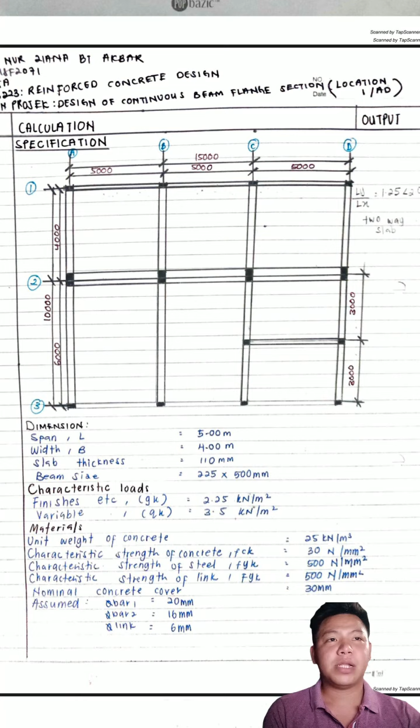Calculation beam 1AD. Effective flange width BW sama dengan 225 mm, HF sama dengan 110 mm, H sama dengan 500 mm, B1 sama dengan 1887.5 mm, B2 sama dengan 0, LO sama dengan 0.7, L sama dengan 0.7 darab 5000 sama dengan 3500, BV sama dengan 0.2 BI tambah 0.1 LO lebih kecil daripada 0.2 LO.

0.2 BI tambah 0.1 LO sama dengan 727.5, sama lebih kecil daripada 700. Use 700 mm.

Effective flange width BF sama dengan BF tambah BW lebih kecil daripada B sama dengan 700 tambah 225 sama dengan 925.

Span AB, CD LO sama dengan 0.85, L sama dengan 0.85 darab 5000 sama dengan 4250 mm.

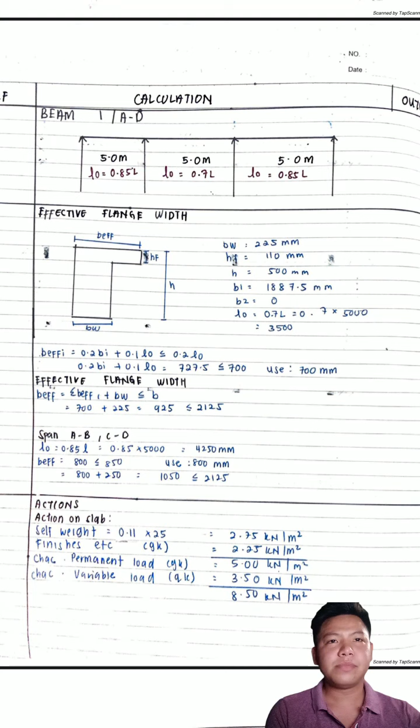Calculation. Action on beam 1AD. Distribution of action from slabs to beam are as follow. Panel 1AD.

Characteristics permanent action. WO sama dengan BW, H tolak HF darab 25 sama dengan 0.225 darab dalam kurungan (0.5 tolak 0.11) darab 25 sama dengan 2.19 kN meter.

W1 sama dengan BVN LX sama dengan 0.57 darab 5.00 darab 4.00 GK sama dengan 11.4 kN meter. Total GK sama dengan 13.59 kN meter.

Characteristics variable action. W1 sama dengan BVN LX sama dengan 0.57 darab 3.50 darab 4.00 sama dengan 7.98 kN meter. W2 BVN LX sama dengan 0.57 darab 3.50 darab 4.00 sama dengan 7.98 kN meter. Total QK sama dengan 15.96 kN meter.

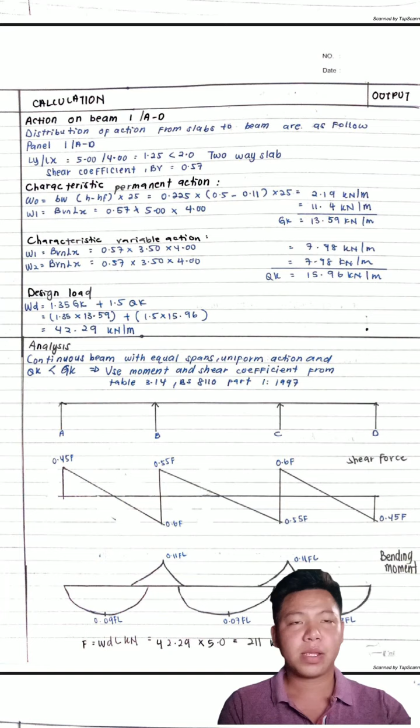Concrete strut capacity. Kami mendapat VRD max sama dengan 320 kN, theta 22 darjah sama dengan 464 kN, theta sama dengan 45 darjah.

Support A dan D. VED sama dengan 95 kN, VRD max cot theta 2.5 sama dengan 320 kN, VRD max cot theta 1.0 sama dengan 464 kN.

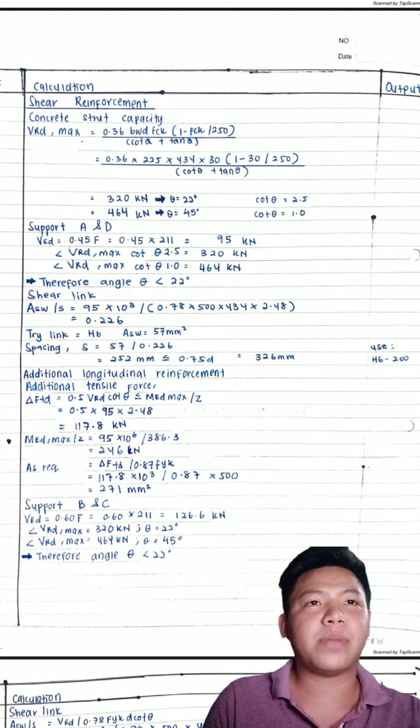Additional longitudinal reinforcement, additional tensile force FTD sama dengan 117.8 kN, As req sama dengan 271 mm².

Deflection check at span AB, percentage of required tension reinforcement P sama dengan 0.005.

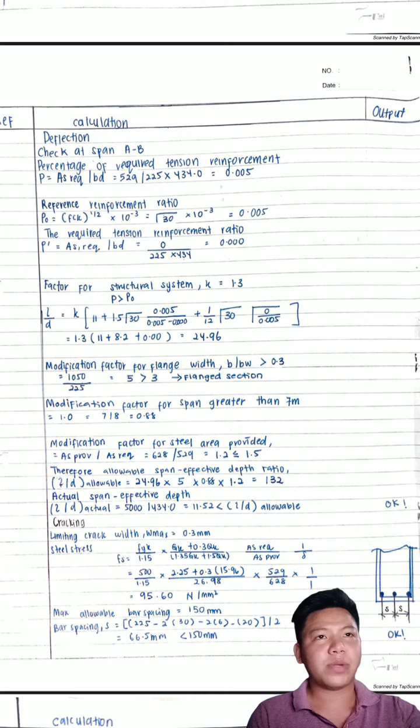Factor for structural system K sama dengan 1.3. Modification factor for span greater than 7 meter sama dengan 1.0 sama dengan 7 bagi 8 sama dengan 7/8 sama dengan 0.88. This is calculation detailing.

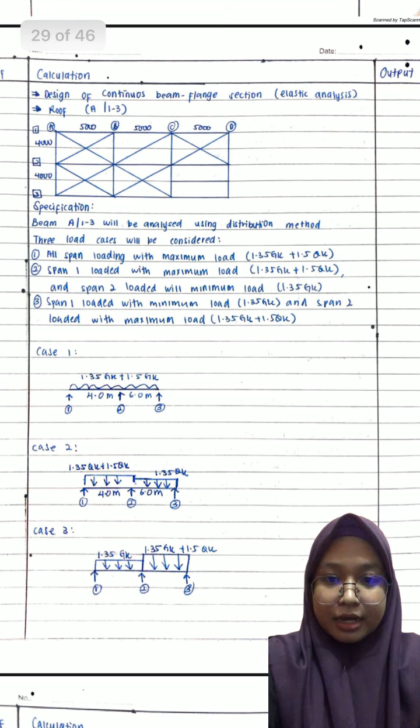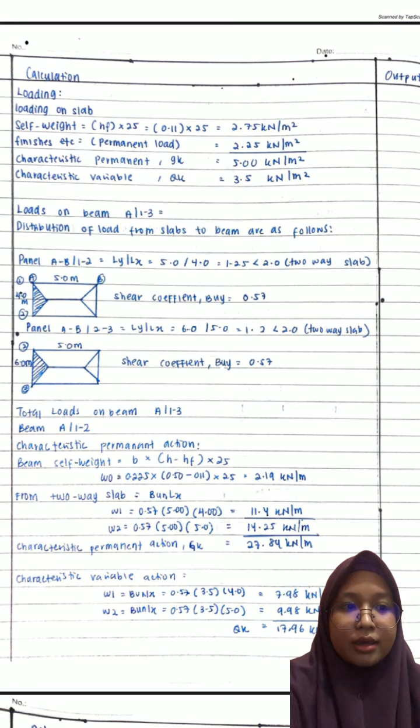Ini merupakan pengiraan loading on slab. Untuk self weight pula, kami dapat 2.75 kNm², dan permanent load dia 2.25 kNm², GK dia 5.00 kNm², QK dia 3.5 kNm².

Bagi pengiraan load cases pula terdapat dua pengiraan, iaitu W1 dan W2, maksimum dan minimum. Bagi maksimum pula kami dapat 64.52 kNm dan minimum dia kami dapat 37.58 kNm.

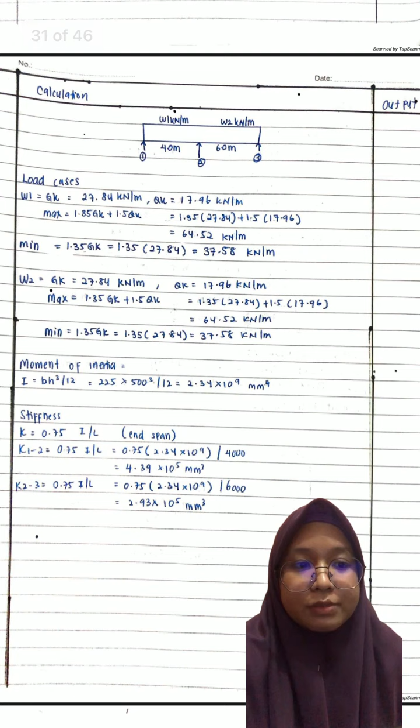Bagi moment of inertia pula, kami dapat 2.34 darab 10 kuasa 9 mm kuasa 4. Dan bagi pengiraan stiffness pula, K1 hingga 2, kami dapat 4.39 darab 10 kuasa 5 mm kuasa 2. Dan K2 hingga 3, kami dapat 2.93 darab 10 kuasa 5 mm kuasa 3.

Distribution factor pula, join 1, F1 hingga 2, kami dapat 1.00, F2 hingga 1 kami dapat 0.60, F2 hingga 3 kami dapat 0.40, manakala join ketiga F3 hingga 2 kami dapat 1.00.

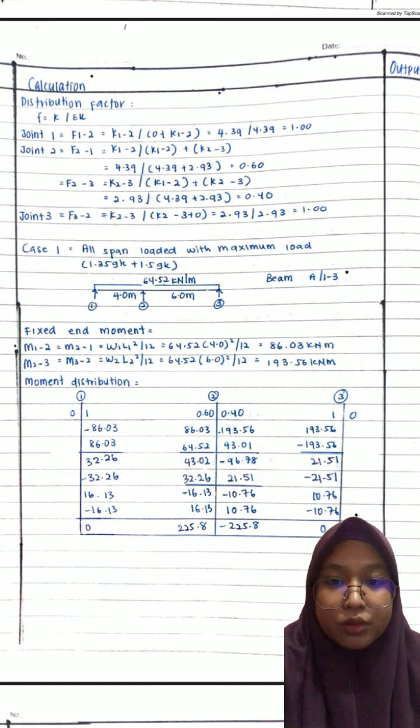Dan ini merupakan pengiraan case 1, fixed end moment dia, M1 hingga 2 kami dapat 86.03 kNm, M2 hingga 3 kami dapat 193.56 kNm. Bagi moment distribution case 1, faktor 0.60 kami dapat 225.8, manakala faktor 0.40 kami dapat negatif 225.8.

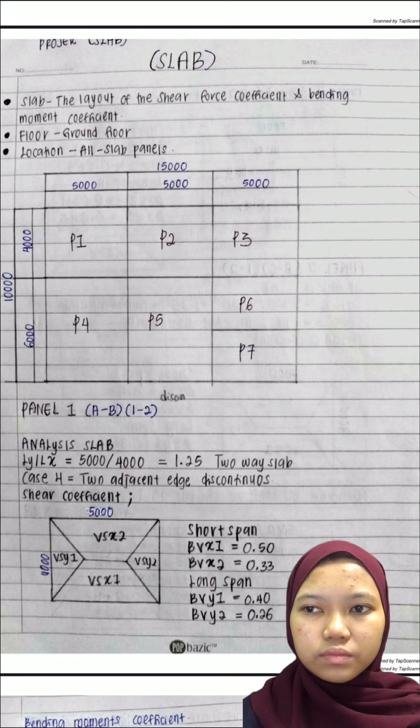Slab design, floor, first floor, location 1 to 2 or A to B. Specification, characteristic action, permanent GK 2.25 kN per square, variable QK 3.5 kN per meter square, design life 50 years, fire resistant R60, exposure classes XC1, and materials.

For FCK, we got 30 Newton per millimeter square, FYK 500 Newton per millimeter square, and for unit weight of reinforced concrete, we got 25 kilonewton per meter square. For diameter bar is 10 millimeter.

Design slab panel A to B, long LY 5000, LX 4000, LY over LX 1.25. It's smaller than 2.0, that means it's two-way slab.

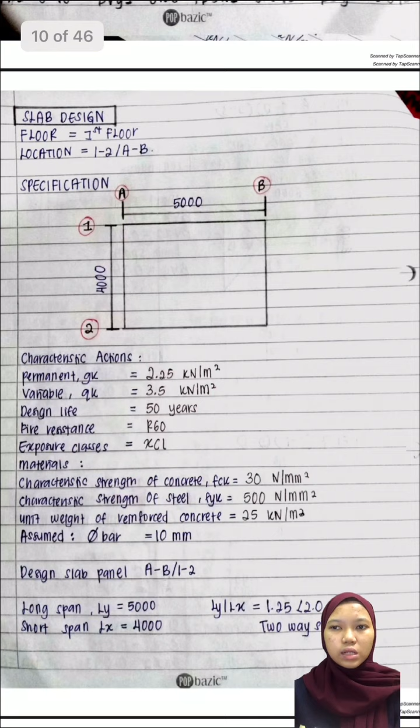For slab thickness, minimum thickness for fire resistant is 80 mm, and the H is 4000 over 30. We got 133.33 millimeter, and we try H is 135 millimeter.

For durability, fire and bond requirement, Cmin,b, we got 10 millimeter, Cmin,dur 15 millimeter, and A 10 millimeter. For Cmin, 10 minus 0.5 we multiply to 10, we got 5 millimeter. For CNOM, we got 25 millimeter.

Action on slab, self weight 0.135 multiply 25, we got 3.38 kilonewton per meter square, and for permanent load 2.25 kilonewton per meter square, and characteristic permanent action GK 5.63 kilonewton meter square, and QK 3.50 kilonewton per meter square.

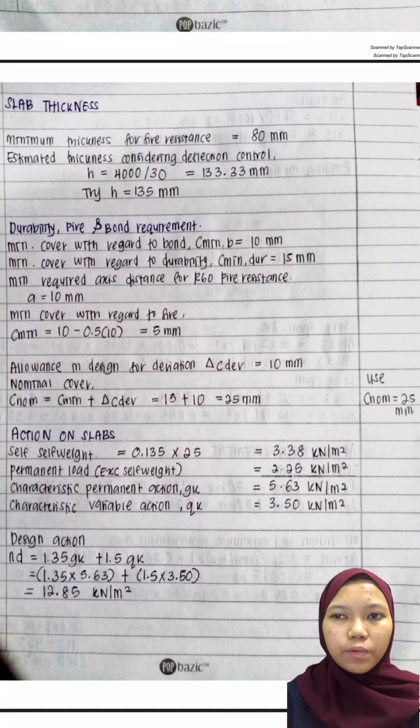For design action ND, we got 12.85 kilonewton per meter square.

Next is analysis. For case 4, two adjacent edges discontinuous. For short span LX, MSX1, we got 10.49 kilonewton meter per meter, and MSX2, we got 14.19 kilonewton meter per meter. And for long span MSY1, we got 7.00 kilonewton meter per meter, and MSY2, we got 9.25 kilonewton meter per meter.

For main reinforcement effective depth DX, we got 105 millimeter, and DY we got 95 millimeter. And minimum and maximum reinforcement area 160 millimeter square per meter, and AS max we got 5,400 millimeter square per meter.

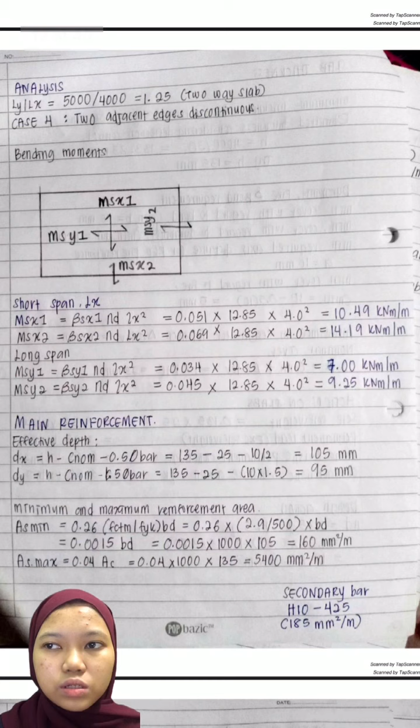And secondary bar H10 to 425, we use 185 millimeter square per meter.

For short span, mid span MSX1, we got 10.49 kilonewton per meter. K, we got 0.032, smaller than 0.167. Compression reinforcement is not required. AS, we got 241.75 millimeter square per meter, and we use 262 millimeter square per meter.

For support MSX2 is 14.19 kilonewton per meter. K, we got 0.043, smaller than 0.167. And for compression reinforcement is not required. AS, we got 327.02 millimeter square per meter, and we use 349 millimeter square per meter.

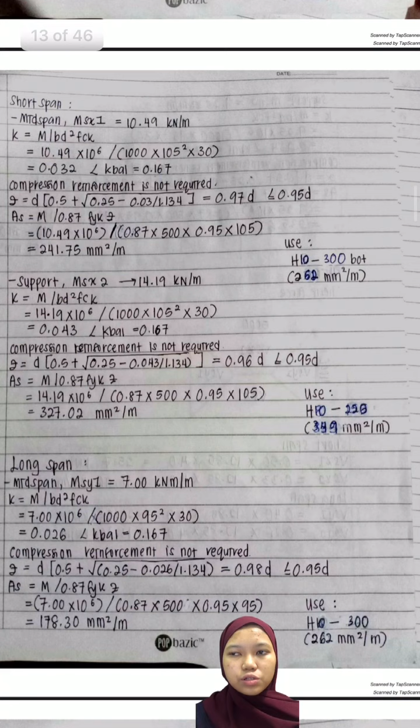For long span, mid span MSY1 is 7.00 kilonewton meter per meter. K, we get 0.026 smaller than 0.167, and compression reinforcement is not required. AS, we get 178.30 millimeter square per meter, and we use 262 millimeter square per meter.

And for MSY2, we get 9.25 kilonewton meter per meter. K is 0.034 smaller than 0.167, smaller than 0.167, and compression reinforcement is not required. We got 235.02, and we use 262 millimeter square per meter.

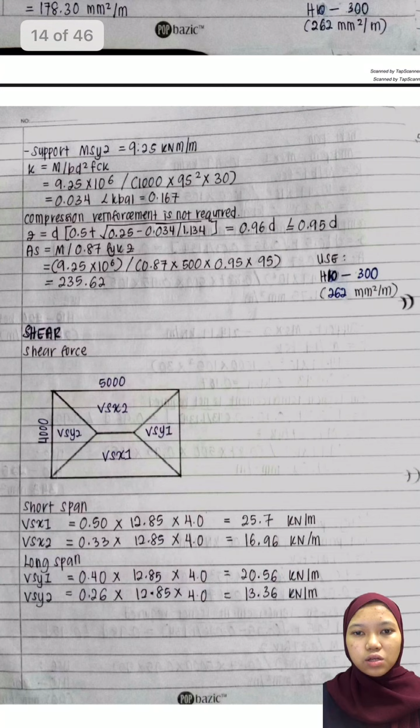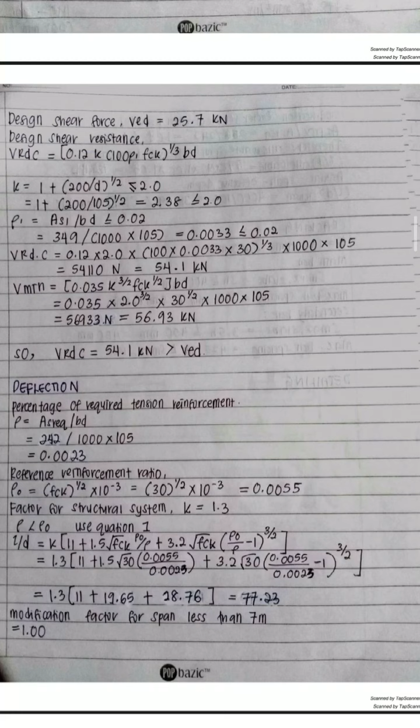And for shear force, short span VSX1, we get 25.7 kilonewton per meter, and VSX2 we get 16.96 kilonewton per meter. And for long span VSY1, we get 20.56 kilonewton per meter, and for VSY2 we get 13.36 kilonewton meter. Design shear force VED, we got 25.7 kilonewton, and K, we got 2.38 smaller than 2.0.

For P1, we got 0.0033 smaller than 0.02. For VRDC, we got 54.1 kilonewton, and Vmin, we got 56.93 kilonewton. So VRDC is 54.1 kilonewton bigger than VED.

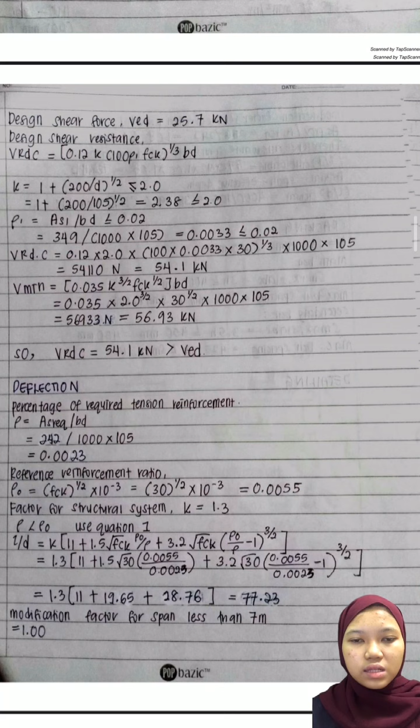For deflection, percentage of required tension reinforcement P is 0.0023, and reference reinforcement ratio PO is 0.0055, and for factor structural system K is 1.3. For modification factor for span less than 7 meter is 1.00.

For cracking, H is 135 mm smaller than 200 mm, and for main bar S max, slabs, 3H is smaller than 400 mm, and for max bar spacing we got 300 mm. For secondary bar, S max slabs 3.5H smaller than 450 mm, and max bar spacing is 425 mm. So this is the detailing of slab.

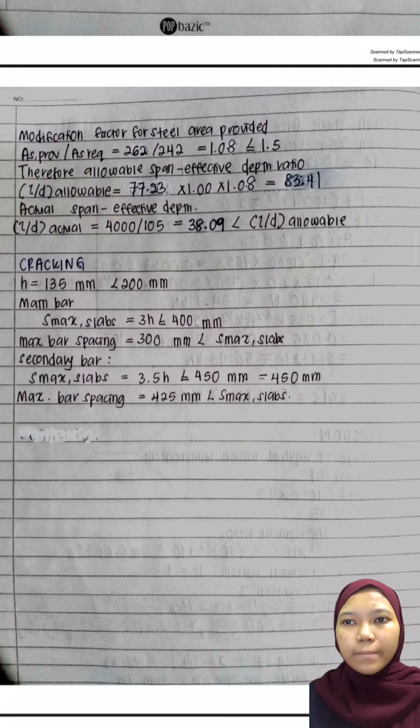The dimension is LX 4000 mm, and for long span LY 5000 mm, and for thickness H is 135 mm, and concrete cover is 25 mm.

Next is the modeling. The slab modeling, we use cardboard and steel string for our materials, and the dimension is 15 cm for the width, and height is 2 cm.

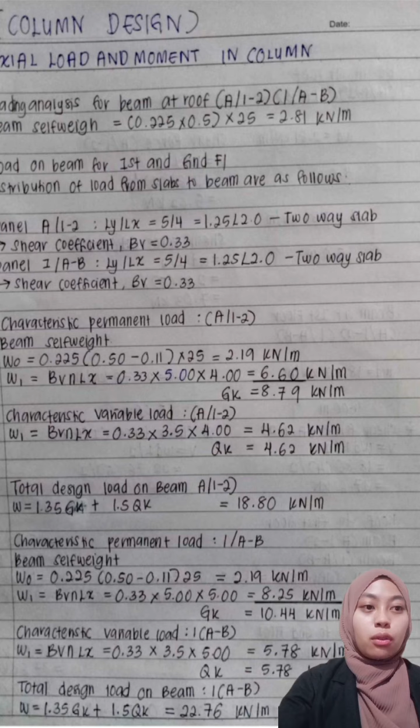The characteristic variable load at 1 A to B, W1 is 5.78 kN per meter, so QK is 5.78 kN per meter. The total design load on beam at 1A to B is W equals 1.35 GK plus 1.5 QK, is 22.76 kN per meter. Next we find the NED.

The beam at roof: shear force at A1 to 2 is 5.62 kN and shear force at 1A to B is 7.03 kN. The beam at first floor: shear force at A1 to 2 is 37.6 kN and shear force at 1A to B is 56.9 kN.

For roof to first floor, the column self-weight is 1.35 times 0.28 times 0.35 times 4.0 times 25, is 13.23. The beam A1 to 2 is 5.62, beam 1A to B is 7.03 kN. So the total is 25.88 kN, which is the NED from first floor to roof.

Next is first floor to ground floor. The load from above is 25.88 kN, the beam at A1 to 2 is 37.60 kN, and the beam 1A to B is 56.90 kN. The column self-weight that we got is 13.23 kN. So the NED from ground floor to first floor is 133.61 kN.

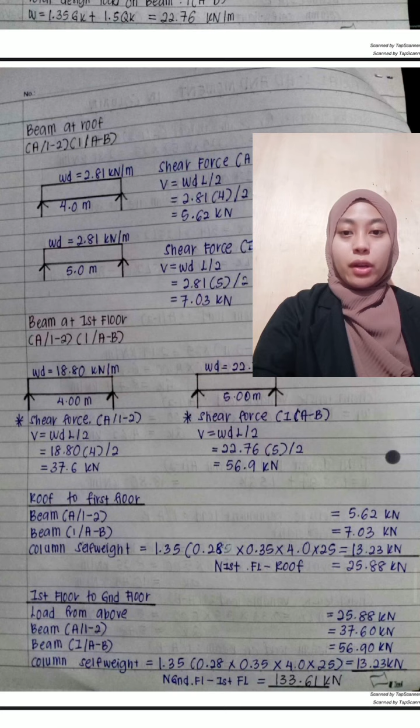After we got the axial load and moment in column, we can design the non-slender column when moment exists. The axial force NED is 133.61 kN. The specification for the design of the non-slender column is concrete FCK with 30 N per millimeter square, reinforcement FYK with 500 N per millimeter square, exposure class XC1, fire resistance 1.0 hours, size B times H is 275 times 350 millimeter.

The effective length is 6 meter and diameter base is 20 millimeter. For durability, bond and fire resistance: C min b is 20 mm, C min durability is 15 mm, ASD is 36 mm, and C min we got is 20 mm, and C norm we got is 30 mm. So we use C norm with 30 mm.

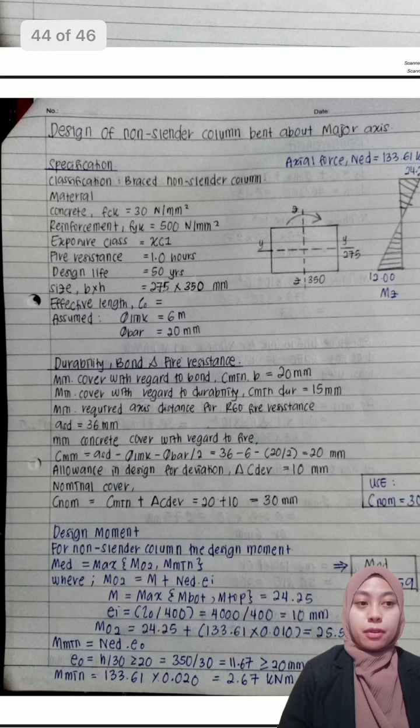The design of moment: MED we got is 25.59 and M minimum we got is 2.67 kN meter.

Next is the reinforcement. D2 per H is 0.13, N per BH-FCK is 0.046, and M per BH2 FCK is 0.03. Since the calculation for N per BH FCK and M per BH2 FCK does not intersect on the design chart, therefore AS min was used as column reinforcement.

AS minimum we got is 30.71 mm square or 192.5, and AS max we got is 3850 mm square. So we use 4H10 which is 314 mm square.

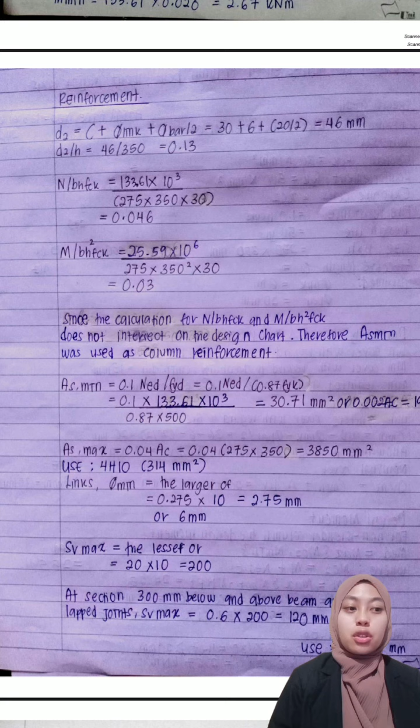Link diameter minimum is the larger of, we got 2.75 mm, and SV max the lesser of, we got 200 at section, 300 mm below and above beam and lap joint SV max is 0.6 times 200, we got 120 mm. So we use H for 120 mm.

The last that I'm going to talk about is our model of column. In our model, the materials we use are first cardboard, second steel string, and the last one is fishing string.

The height of column is 15 centimeter and the width is 4 centimeter, and the distance frame from each link is 2 centimeter, and the footing width is 6 times 6 centimeter with height 2 centimeter. So that was our model of column.